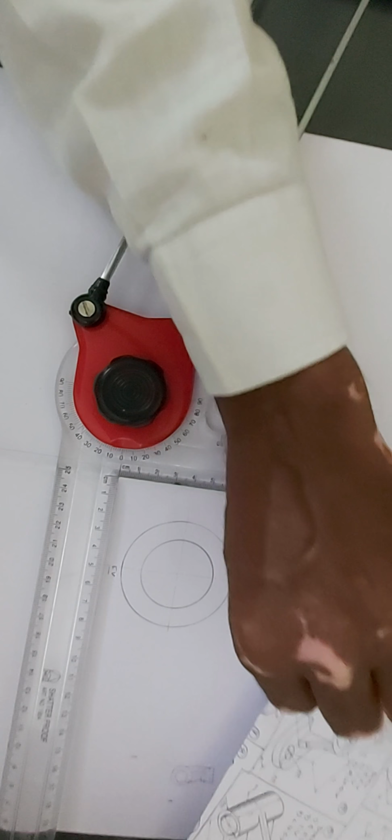Yes, today we will see this problem. This problem is mentioned in the book, so you can refer to the book, TechMax book or Techno Knowledge book or Tech Knowledge publication book. This problem is available. So the question is: draw sectional front view looking from X.

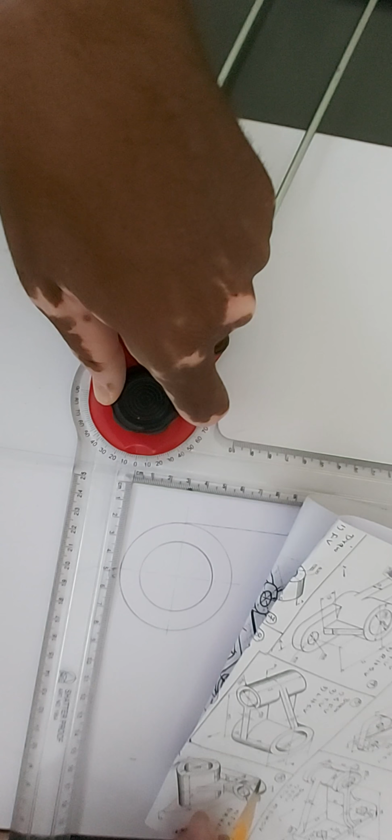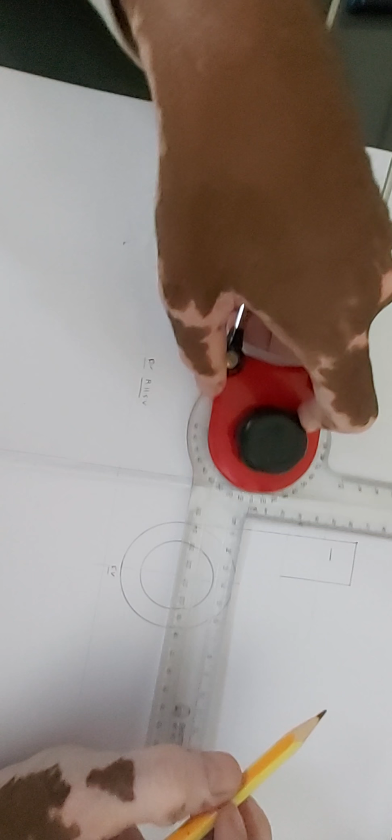is easier than others, that view we have to draw first.

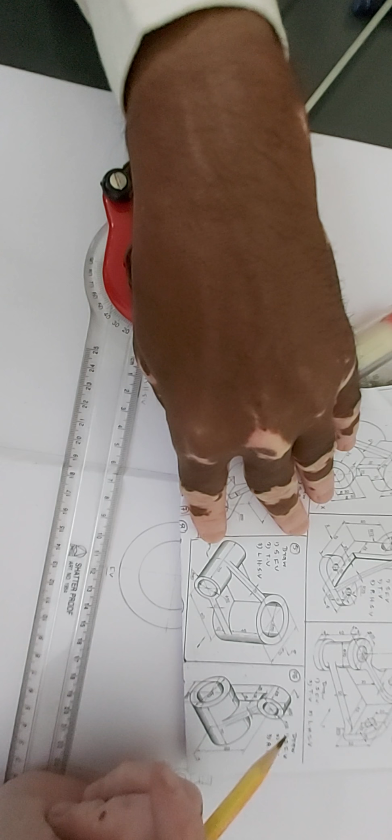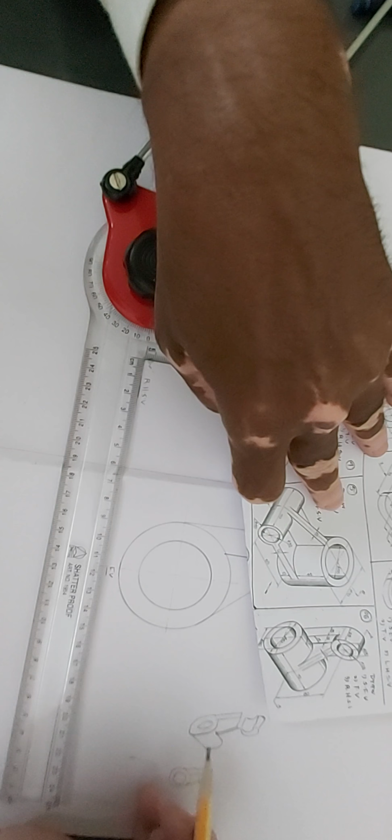According to first angle method of projection, front view above the reference line, so this is the XY line, faint line. Front view above the reference line, top view below the reference line, and right hand side view on the left hand side of the front view. Question is draw sectional front view, top view and right hand side view. So right hand side view will be on the left hand side of the front view.

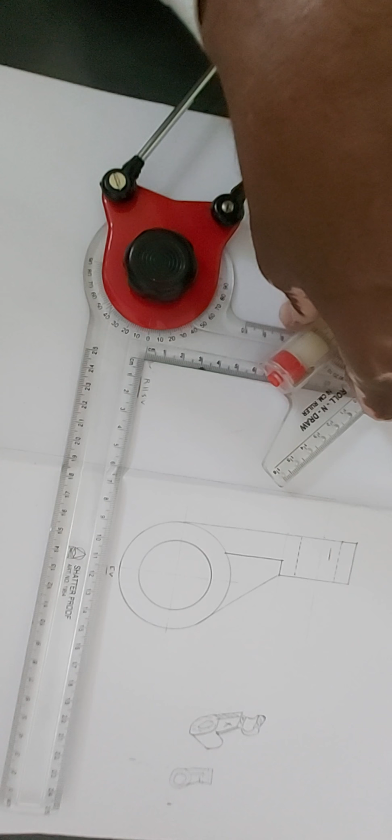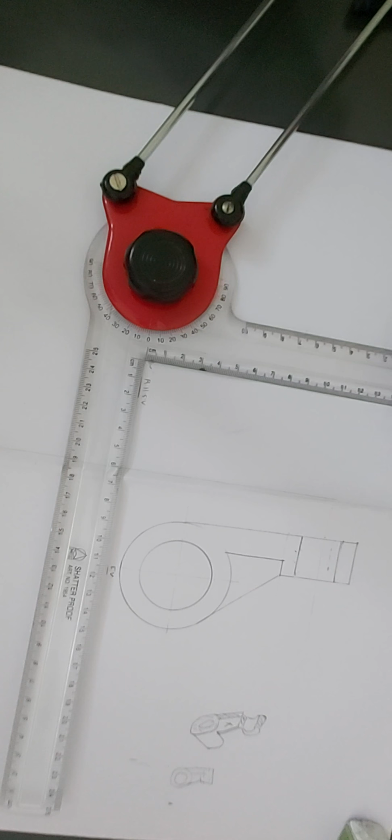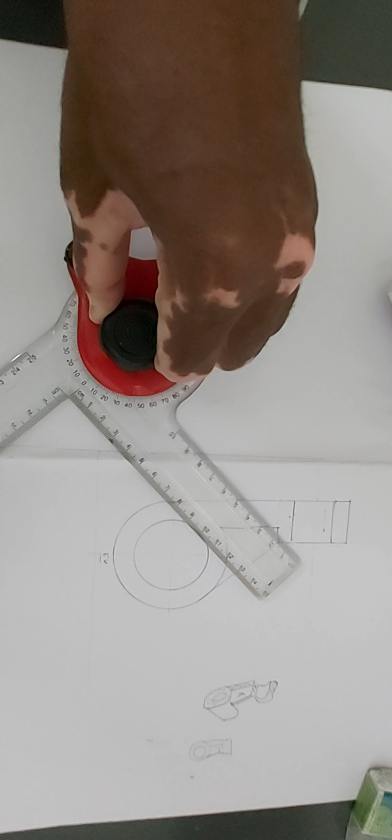So this is the front view. So first we have to draw these two circles, one diameter 60, another diameter 40. So this is the view. This circle of diameter 60 and internal circle diameter is 40. So diameter 60 means radius 30. First I will draw a circle like this. And internal circle of diameter 40 means radius 20.

Whenever the circle comes, you have to draw center line: one long dash, one short dash, one long dash, one short dash. Then after that, from this center to this center height is 80 millimeter.

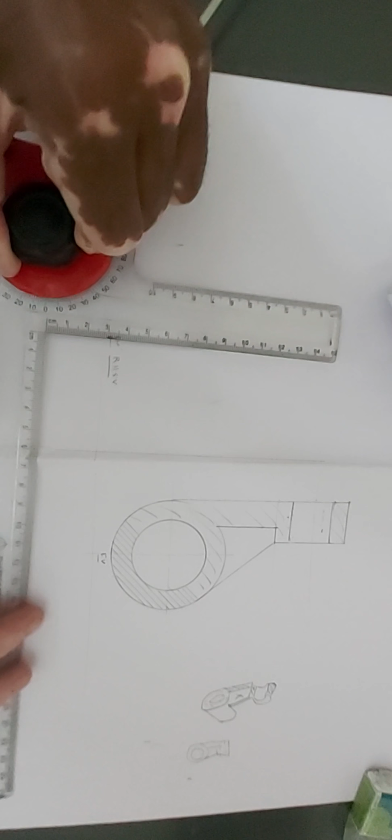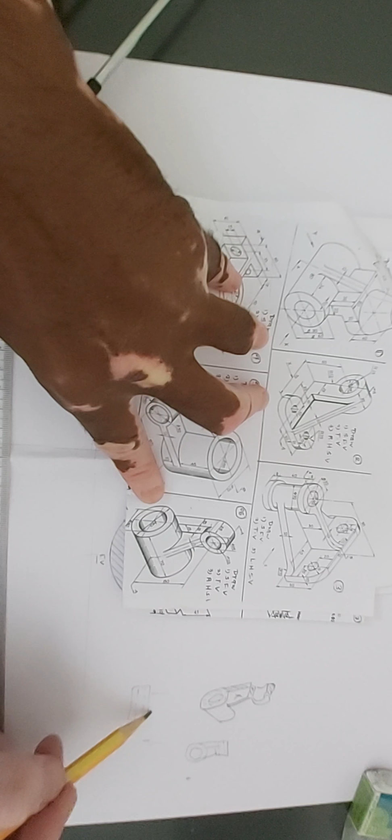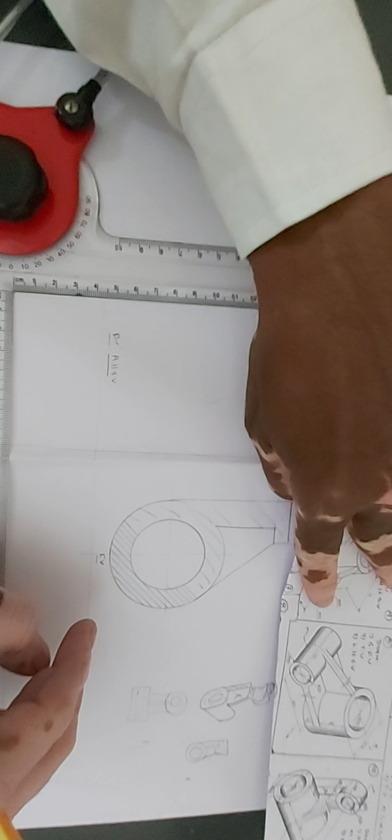Then cylinder of radius 20. So radius 20 means 20 mm below and 20 mm above, like this. So this is the wall, and this width is 25. Cylinder width is 25. So this 25 and this 20 mm below, 20 mm above.

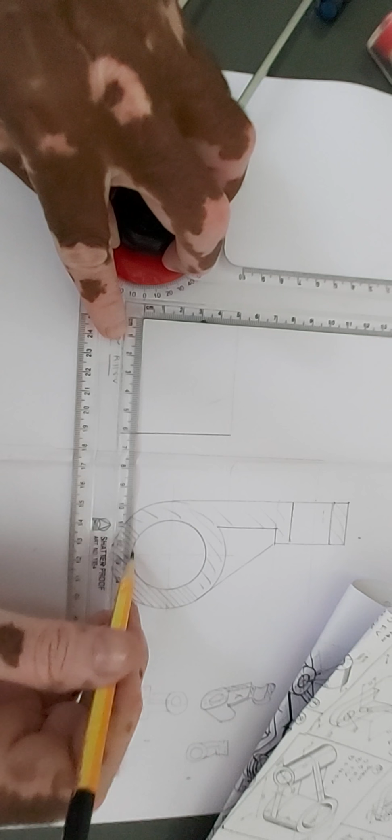Like this, and in this there is a circular hole of diameter 24. Diameter 24 means radius 12, so 12 mm below, 12 mm above, like this. And this wall is of 15 millimeter, so this 15 millimeter, like this. And there is a rib like this.

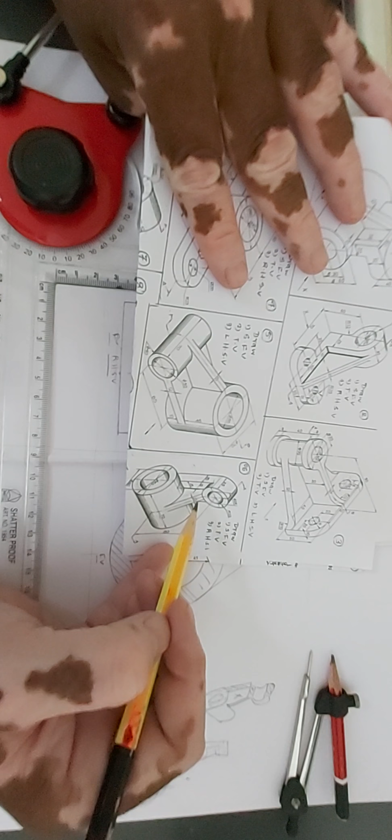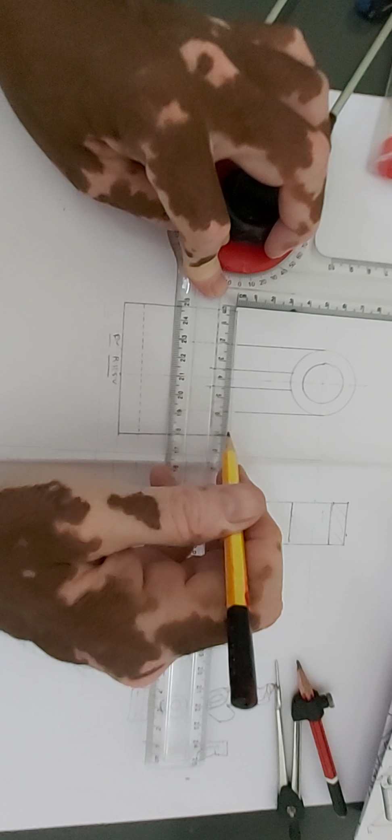So this hidden becomes continuous, this hidden becomes continuous, and in cut portion we have to draw section lines inclined at 45 degree. So section lines inclined at 45 degree, gap 1 to 2 mm and it should be uniform.

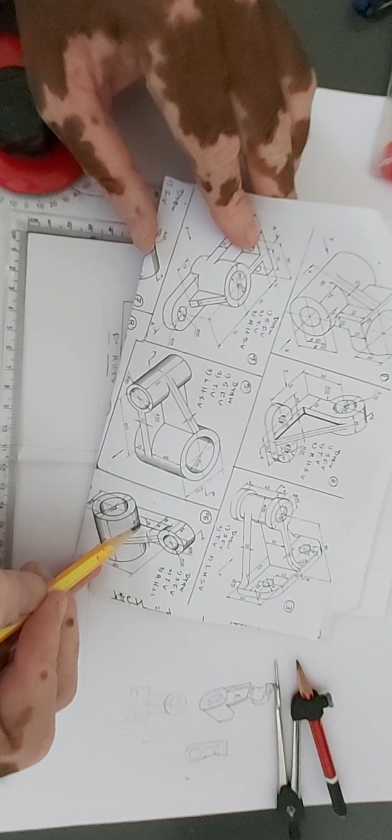Okay, so this section line inclined at 45 degree, gap 1 to 2 mm.

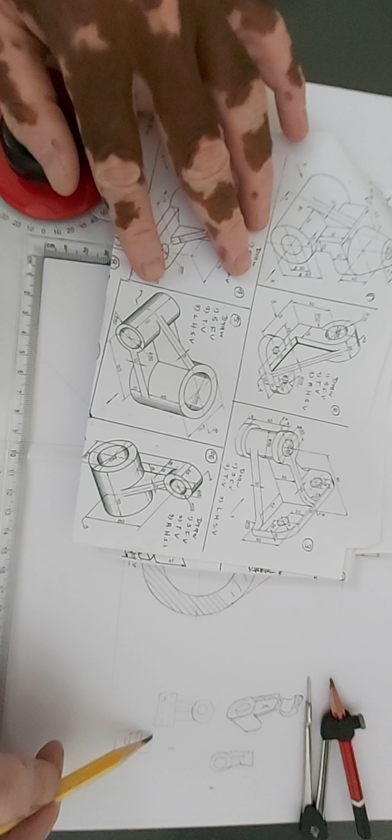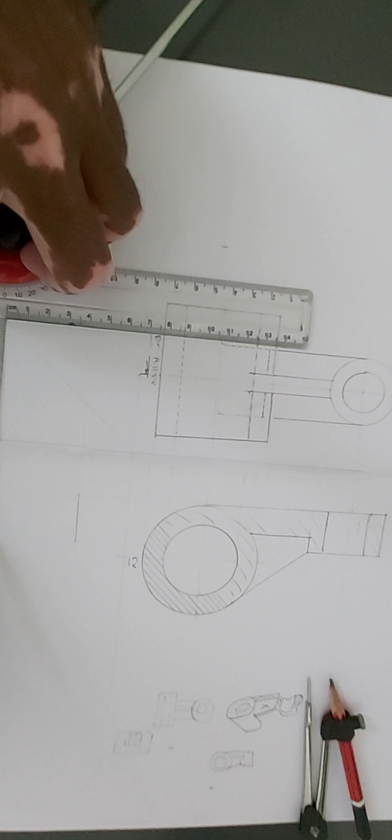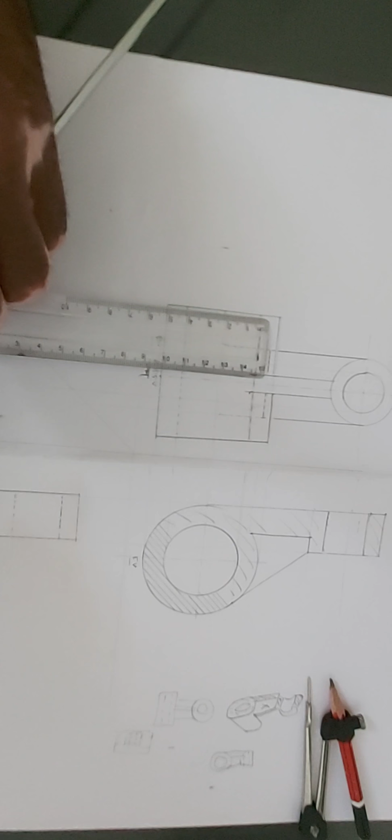So side view contains width and height. So height will be projected from front. So cylinder height this much, that is 60, will be projected from front, and width is given to us. This 70. So take 70 mm, this. In this there is a circular hole that is invisible.

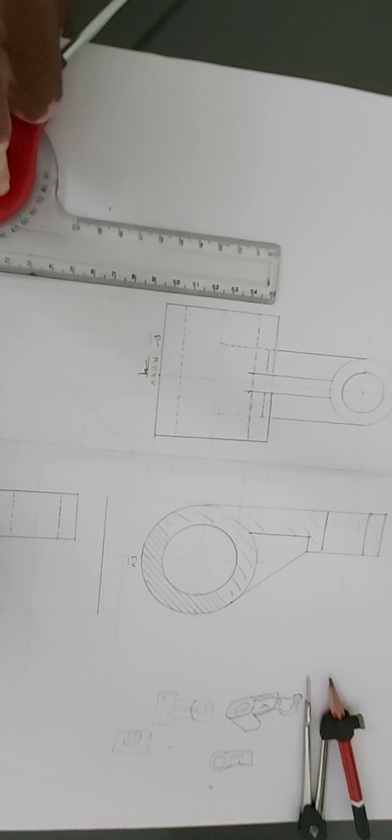So invisible means hidden line, dotted line you have to draw. This hidden line, center line, and this hidden line. Okay. After that, this midpoint, that is 35, draw center line here.

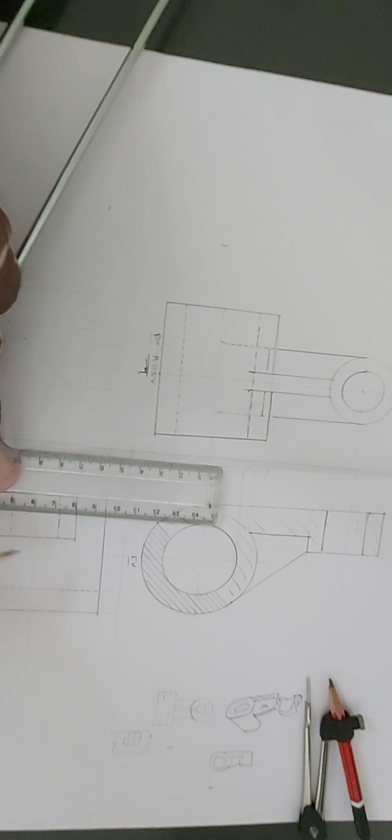That is cutting plane also, and project this center line from front. So you will get center here.

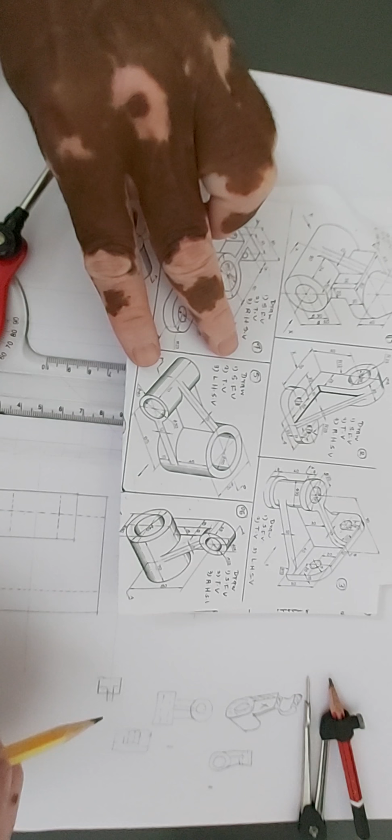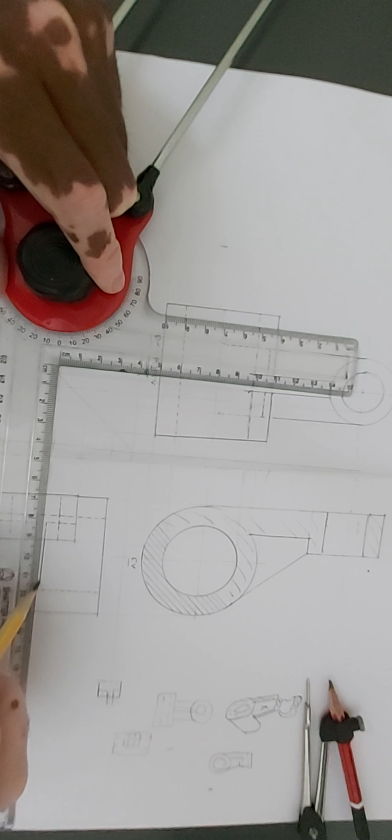Then this wall visible, then invisible. This wall visible, then invisible. Why it is invisible? Because this wall is penetrating to this cylinder. So that wall is backside of this cylinder, that's why it is invisible.

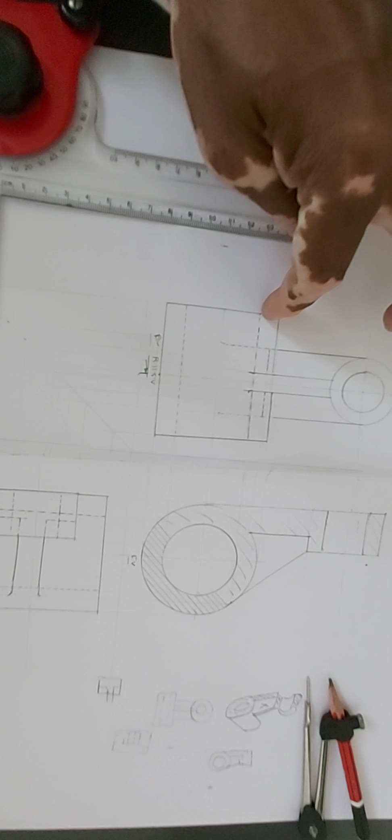Then this rib's width is 10 millimeter. So 5 mm on the right side of the center line and 5 mm on the left side of the center line. This rib is also penetrating to the cylinder up to tangent point. So this tangent point, and make slight curve here and dark the cylinder.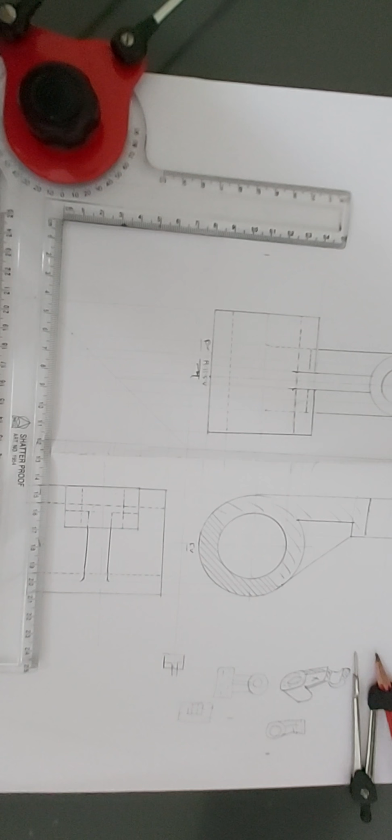One more thing, this is the surface of the cylinder. This edge similarly on the right hand side, due to this surface of the cylinder, that is invisible. So how it will be made? So project this point, that is invisible, like this.

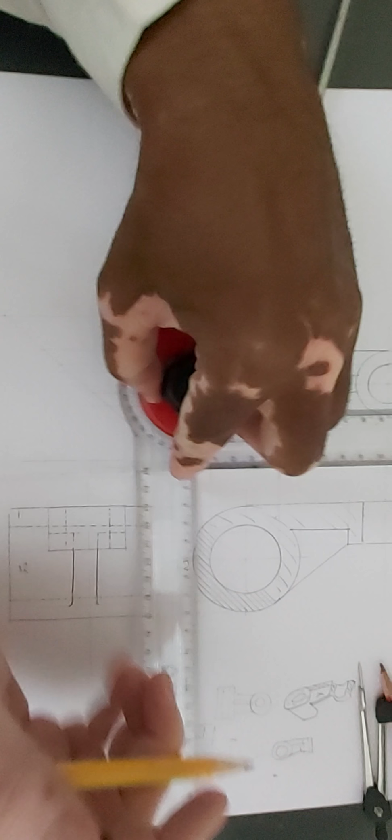Okay. And cutting plane symbol looks like center line, ends are dark, and cutting plane direction from right hand side is left to right. So draw an arrow here, left to right. So this is sectional front view and side view.

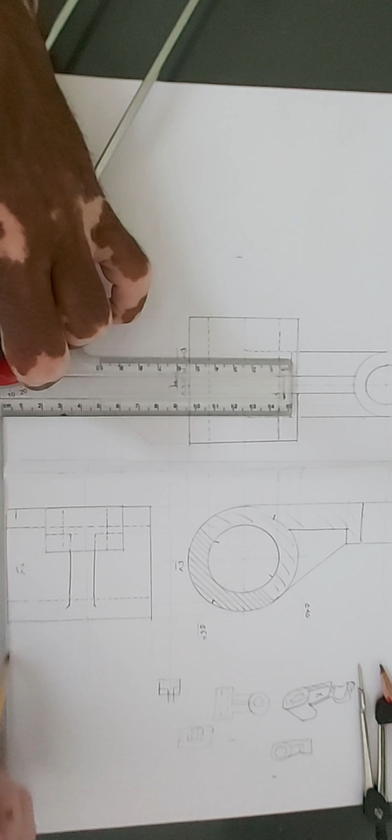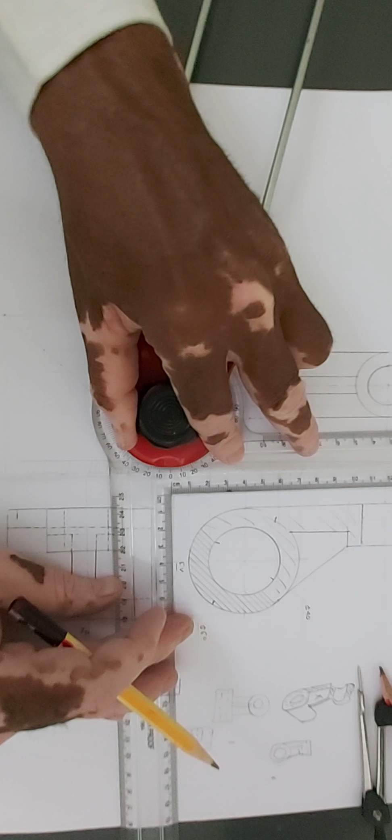Similarly top view. So to draw top view, we have to draw 45-degree line here. So when you will see from top, this cylinder will look like a rectangle. In this there is a circular hole which is invisible. Then this bigger cylinder will look like a rectangle. In this there is a circular hole which is invisible.

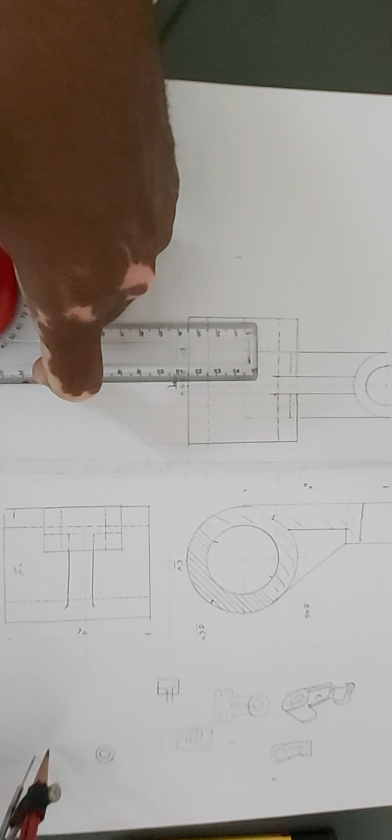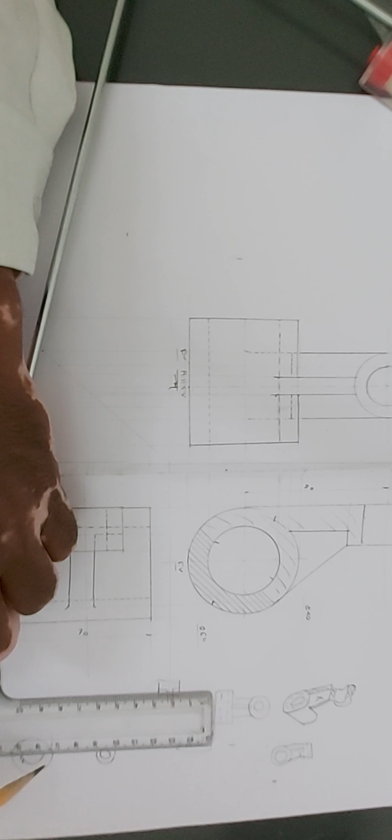So first I am drawing these two cylinders. How it will be drawn? Length of the small cylinder can be projected from front, and width of that small cylinder will be projected from side. In this there is a circular hole of diameter 24. So project this diameter 24, that is invisible, and this cylinder will be like this.

Okay. Now project this center line, one long dash, one short dash. Now second cylinder of diameter 60. So this 60, and width 70 will be projected from side. Where this intersects this 45 line, that point is to be projected.

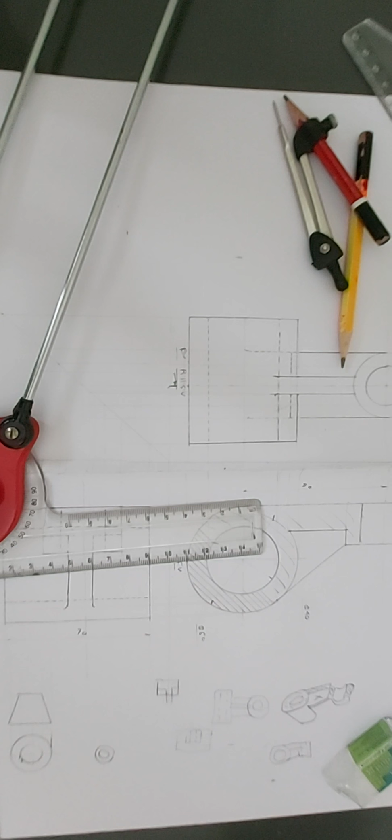So this bigger cylinder, in this there is a circular hole that is invisible. So dotted. Okay. So two parts I have projected. Now third part, this is wall and this rib.